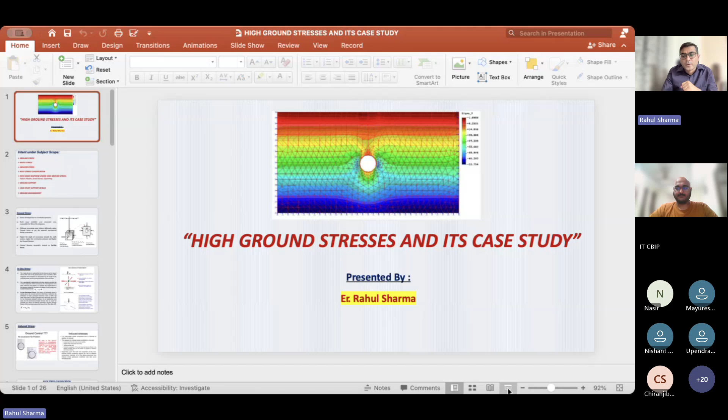Before starting, if there is any glitch in my sound due to network issues or the presentation, please just ping me so that no one misses any information. Now I am sharing my screen with all the participants. I think the screen is visible now, completely, to all of them. I'm sure this tab will not disturb you. You can see my screen completely, though you may notice one extra tab. We can see it completely, we cannot see the secondary tab. Okay, that's good, just a minute.

So again, good evening, good morning, and good afternoon from every part of the world. This is the topic I want to deliver to all the listeners, which is basically high ground stresses and its case study.

Why am I choosing this topic? Because many speakers will talk about FEM and so many things going on underground, but basically we are concerned about the input. I am framing this presentation so that everyone in the listening audience gets some understanding from this information, whether it's site personnel or design personnel, starter, beginner, or intermediate level. At least they will gain a better understanding of high ground stresses, which is one of the critical input parameters in underground structures.

So I will move ahead. The screen is changing, Rishi, because I found the screen is not changing from my end. Yeah, it's not actually changing. That's why, just a minute. Yeah, now it is changing. Yes, yes. I'm sure. So again and again, why is it switching? I'm sure the tab on top is not disturbing anyone. Oh, now it's okay, it's not.

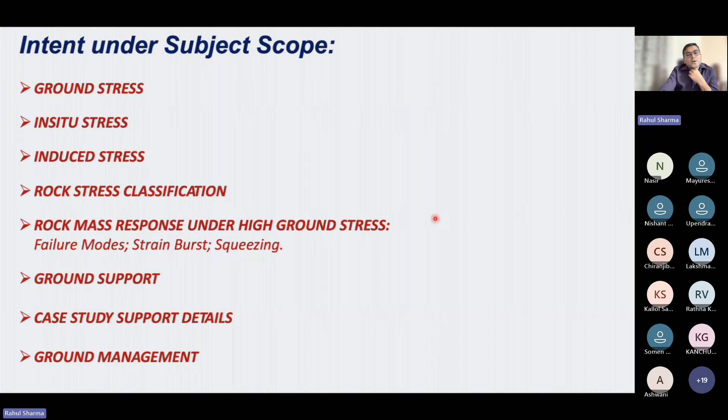So this is basically the intent which I am covering under this scope. The first is the basic theory about ground stresses, in situ stresses and induced stresses. Then we'll move ahead with rock stress classification, the response of the ground under these stress conditions, ground support, and a few international case studies on how they tackled situations arising from high ground stresses, and then ground management theories.

This is basically the ground stresses shown on my screen. Sometimes there is a lot of confusion in the industry about what is in situ stress and what is ground stress. So I am talking from scratch: whenever we make any underground structure beneath the ground, we are basically dealing with two kinds of stresses. One is near field stresses and one is far field stresses.

If you see this figure, which I'm highlighting with my pointer, the complete pressure coming as an overburden pressure is basically the ground stresses, which we can also term invariably as in situ stresses. It has basically three parts: the vertical stress, horizontal stress, and intermediate horizontal stress. If defined in matrix form, it will be a well-bore coordinate defined on a rotational matrix basis.

Whenever you are making a boundary, near field stresses will be developed, which is in a radial and tangential direction along the tunnel boundary. So basically, the complete ground stresses are divided into two parts: near field stresses and far field stresses. Whenever we are disturbing the ground, the boundary which is coming under the influence of the formation of tunnel is called far field stresses. And exactly at the boundary between the ground and the tunnel cavity, it's called near field stresses. Both of these stresses come under ground stresses or in situ stresses.

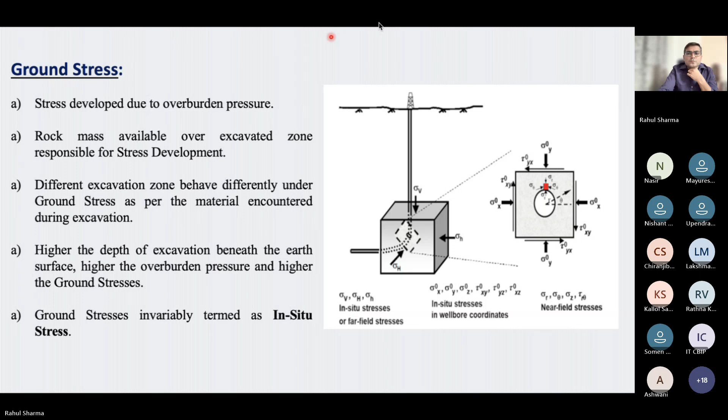I think there is a network issue. It's visible. Next slide is visible. No, actually my slide is not. Just a minute. Maybe I think there is an issue with the network. Sorry for the interruption.

It's very easy to equate in situ stresses with overburden stresses, but sometimes when you go into a mountainous region, the more critical condition becomes in situ horizontal stresses. So we have to keep in mind, whenever designing underground infrastructure, what will be the stress regime inside the ground - that is, the overburden stress as well as the horizontal stresses developed due to tectonic action. These horizontal stresses are equally important as compared to overburden pressure when you go into a high mountainous region, because that is one of the principal parameters to design the alignment of our tunnel.

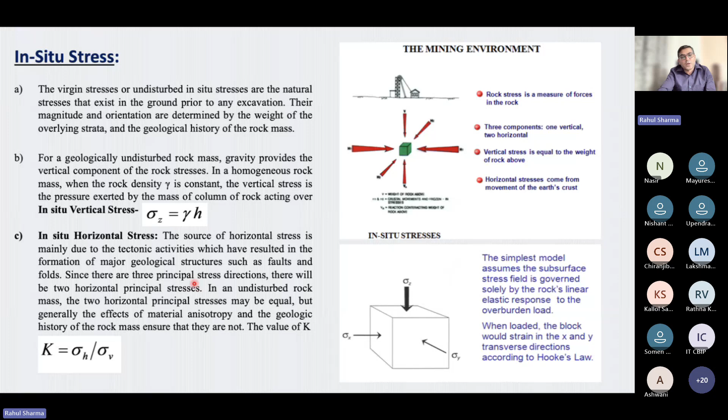So this is the question - why we are saying these are important - because when you are making any kind of cavity inside the mountain, you will find there is a stress regime that exists in an equilibrium condition. When you're not making any cavity, there is no issue. But if you're making a cavity, then your stresses will be mobilized. And if these stresses are not mobilized adequately, it will go again into a compression mode and try to destabilize your tunnel or cavity.

So this question becomes very important: apart from the ground stresses, in situ stresses, how do you manage these induced stresses? Now the question comes, what will be the induced stresses? In simple terms, it's defined as anthropogenic stresses developed due to the removal of natural material by your excavation techniques. You have to be very careful in what way you are excavating the ground and how you are managing the induced stresses, because the balance between the ground stresses and induced stresses is most important for stabilizing any tunnel cavity inside a mountainous region.

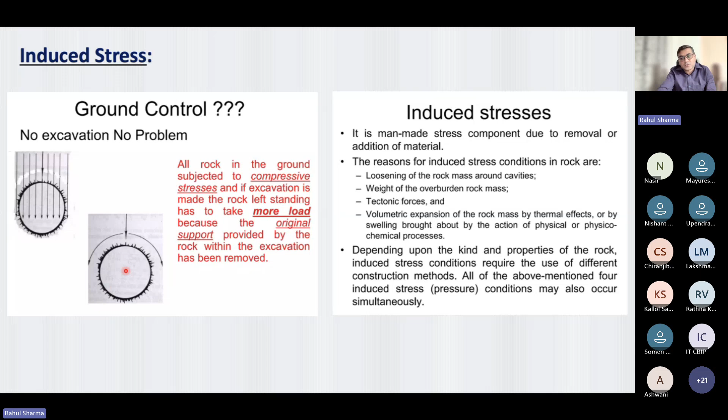Rushi, is my screen visible to you? No, now it is, it's visible. It keeps going back and forth. I'm not sure why it is happening, but okay, now it is visible without any hindrance on the screen, yes, the full screen, that's great.

Now, next is the rock stress classification. The rock stress is basically divided into in situ virgin stresses, which I already explained as ground stresses, and induced stresses, which develop when you do some kind of mining, excavation, pumping, injection, energy extraction, applied load, and swelling. These are the two terms which broadly define the rock stresses. And if you go into the virgin stresses, they have four components, one being tectonic stresses, which is due to the development of plate tectonics.

Then the residual stresses. Sometimes in FEM we put the residual stresses, but what will be the residual stresses? It completely depends on how these rocks will be formed - igneous rock, sedimentary rock, or metamorphic rock. So it will be having a certain procedure of diagenesis, metamorphism, magma cooling. So these residual stresses basically depend on the formation process of these rocks.

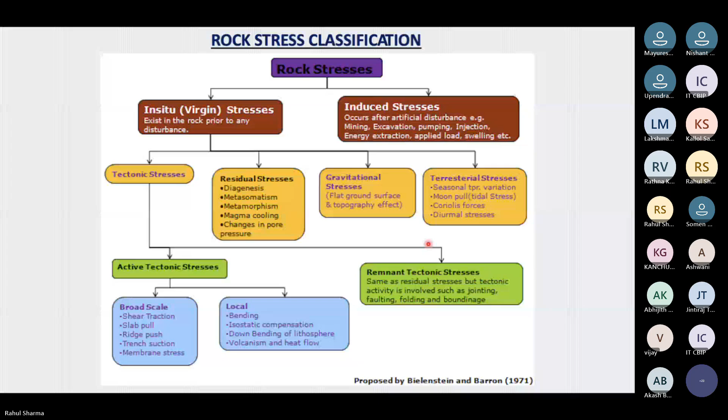So the next is the rock mass response. Now this has become a principle. What we discussed in the previous slides is basically how the rock mass will behave under these ground stresses. So we can discuss the following terms in terms of rock mass stress, ground stress, in situ stress. But in these conditions, how our ground behaves will be coming under this slide. So actually overburden depth, whether height H or Z, whatever term we use, it's basically a stress related problem, which is a function of the following parameters.

So the whole concept of these stresses is divided into three conditions. One is local pre-existing stress field - that means whatever we are doing, either mining or excavation, how induced stress will develop. That means how radial stress will travel and how tangential stress will travel, and that will define your plastic zone as well.

Now the second one is rock properties - that means which rock you are working on, whether basalt, quartzite, phyllite. So what type of rock it is, and what will be the strength of these, and its index properties like density, porosity, sonic velocity. So these, one and two, are functions of your stress related problems.

And the third part is discontinuity. Sometimes it will be clear in mind that rock mass is basically the intact rock plus discontinuities. So the properties of the discontinuities, joint strength, will be very important to assess the stress related problems in the ground.

And if we summarize this graph which I am presenting right now, you will find that to predict the behavior of rock mass adopted for excavation and mining activity - its strength and index property, which is basically its inherent property, details of discontinuity present, that is the nature which develops discontinuities inside the rock, and the other external factors like environment and surrounding. That means how stresses travel because of plate movement, because of certain environmental impact. So this completely gives the information on how your rock behaves when you're doing any kind of disturbance into the rock.

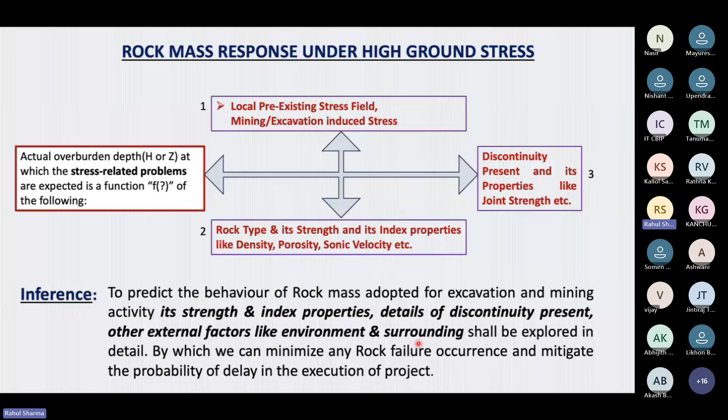This work gives very nice insight into rock engineering in terms of high ground stresses. There's a graph developed around different failure modes by Kaiser and Kim in 2008, defining two phenomena: strain burst, basically rock burst, and rock squeezing. I'll discuss how these work later, but first let's discuss the failure mode.

In this graph, you'll see the term RMR, the rock mass rating, and the next one is sigma 1 upon sigma c. Sigma 1 is basically the in-situ stresses along the boundary, and sigma c is your UCS, the uniaxial compressive strength of the ground. Whether it's basalt, phyllite, or any kind of rock, it has certain properties, the index property of that ground, which we determine in a laboratory.

Sigma 1 is basically the disturbed stresses that develop due to excavation or mining activity. When you see this picture, you'll find that as your RMR reduces, the chances of failure also increase. So he divides this into three zones.

One is a low in-situ stress zone, meaning sigma 1 is 15% lesser than sigma c. In this condition, you can manage by providing proper rock support like bolting, because your response will be either a linear elastic response, or blocks will fall and you'll have to do spot bolting, unraveling, and shotcreting.

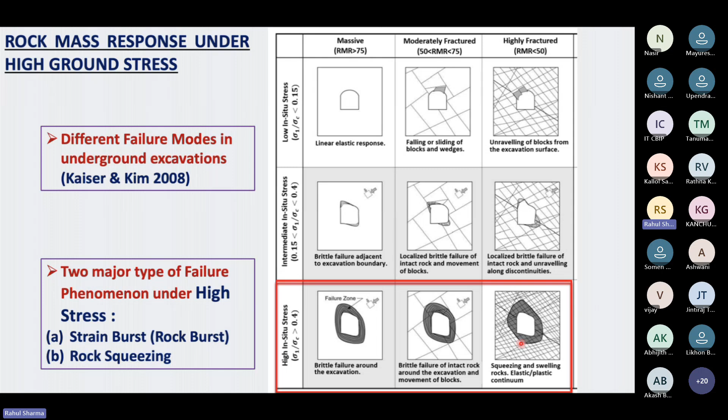Rishi, will it be okay, the pace which I am maintaining right now?

Yes sir, it depends on you. Great, yeah, it's fine.

So this is what we discussed in the previous slide. This one, the outcome is this one. So what I am discussing, it's better to represent in a pictorial manner so that everyone will know what I am trying to say.

So in ground with high stresses, when we go into larger stress conditions, there are two kinds of situations. If it is hard rock, with the uniaxial compressive strength and in situ stress I discussed, then there are chances of strain burst. It's a multiple term - strain burst, rock burst - we can say multiple terms.

So the picture at the bottom, you can find this is the condition of strain burst, where the complete rock will collapse because of the high stress condition.

But if you find soft rock - soft rock is not a very genuine term, we can say hard rock - basically because of fracturing it will be reducing, it will be losing its strength. In such a situation you will find the problem of squeezing. If you see the picture at the top, you will find that your tunnel, whatever section it is, because of the fracturing nature and high stress condition, it will reduce its buckling action, and the whole tunnel will go inside. That is a pure case of squeezing.

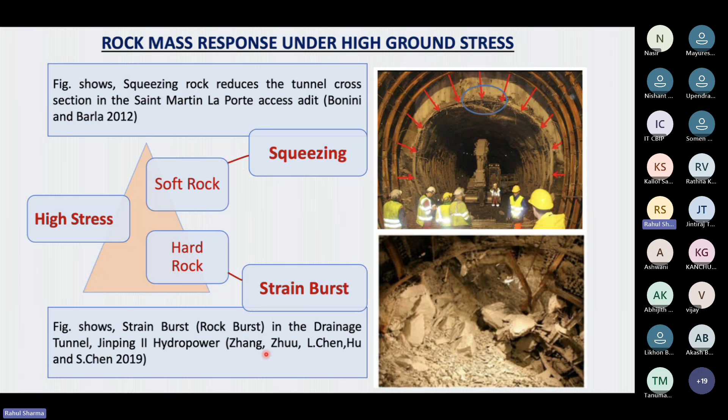So I'm not going to explain further - what I explain will be better judged by the photo as well.

Now the question comes, how can we assess the strain burst and rock burst condition? This is basically taken from multiple books and literature.

The basic concept of strain burst and rock burst is that rock is your massive, interlocked, highly rock mass - for example basalt, granite. These kinds of rock are very strongly interlocked and have less fracture. In this case there are chances of rapid release, causing bursting in massive and highly interlocked rock masses, which can be triggered as a result of rapid strain energy release following rock mass failure, or due to propagation of strain waves due to the adjacent excavation.

Sometimes because of nearby excavation also, if your ground is competent - that means if some work is going on and tunnels are being excavated nearby and the rock is competent - then definitely the excavation will be affected. Same is the situation for structural features like faults.

So seismicity is a very important factor in tunneling or underground works, which is basically about the rock mass itself. As I'm saying, basalt and granite - if such a massive structure undergoes sudden fracturing, then how much energy will be released in a sudden moment? That is the concept of strain bursting.

So strain bursting is basically not triggered by a remote event; the following conditions are necessary. This is the work by Diederichs, 2014, it will be in my references also. Diederichs in 2014 defined the following reasons for strain bursting in tunnels which are not triggered by other events - by itself it is triggering.

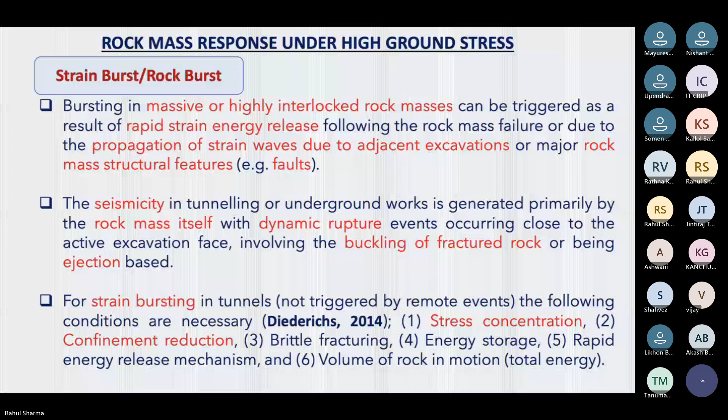The next part is some empirical work done by many people to define rock burst. Frankly speaking, you can just go through these slides and you will find what I'm trying to say.

But in simple terms, when your ground is not competent enough in terms of the in situ stresses developed, when you are making a cavity, you will find these kinds of problems. If your ground is competent enough - that is the whole concept between the plastic zone and yielding zone. If your ground is weaker compared to the handling of your cavity, then definitely the fracturing zone will increase. If this fracturing occurs in a competent rock, then it will cause the problem of rock burst.

This ratio will vary in different books, but sigma theta is nothing but the same kind of tangential stresses. As I previously told, tangential and radial stresses are the in situ stresses. So this sigma theta basically represents the tangential stresses, that is, the stresses developed along the boundary, which is invariably termed as in situ stresses. And this sigma c is the strength of the rock in which you are making a cavity.

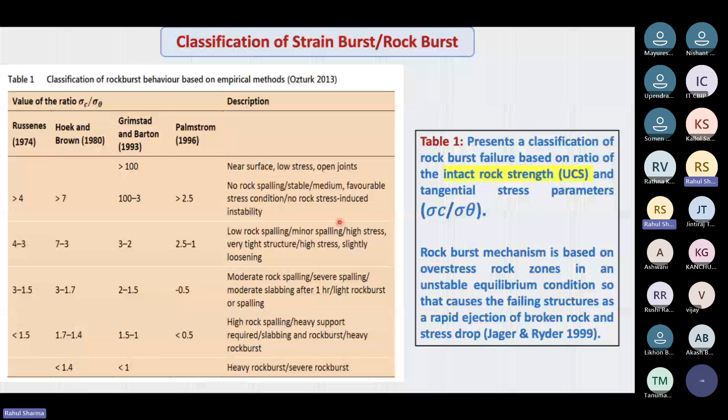So they suggested that if sigma c upon sigma theta is greater than 4, greater than 7, 100 to 3, or greater than 2.5, then there is no chance of spalling or any open joint. And if sigma c upon sigma theta will be decreasing, that will cause an issue of rock bursting chances. So this is all about rock bursting.

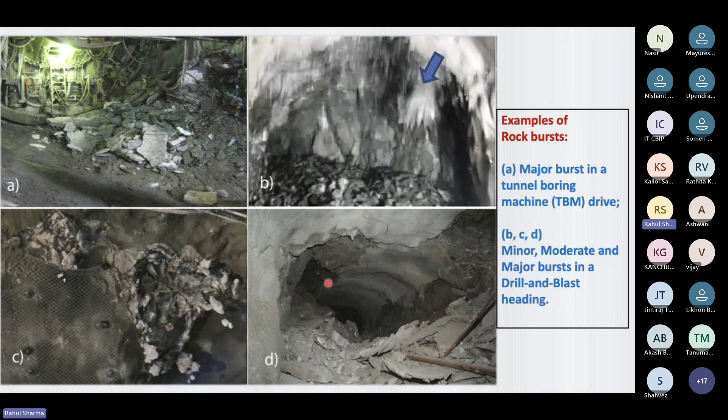So the rock bursting phenomena can be a popping action, it may be a slabbing action, or it may be the complete collapse of your ground. So these are some examples of rock burst.

Now come to squeezing, the other response. I must tell you, it is easy to predict a rock bursting scenario, but it is very difficult to predict squeezing, because as I previously told, squeezing may occur in a strong rock because of large overburden pressure, and squeezing may occur in a weaker rock because of large overburden pressure. So predicting squeezing beforehand, before excavation, at the design stage or tender stage, is a very difficult task.

But yes, if you can do proper geotechnical investigation, you can save so much cost in your excavation. So this is basically the squeezing concept, in which squeezing refers to the ground being weak rock under high stresses. As I told you, either weak rock or high strength rock with a fractured zone, under high stresses, causes the rock mass to undergo large deformation, and this action is called squeezing. And the most important part is that this deformation is not sudden, it may take some time.

So that's why it is very difficult to predict and assess during tender time or design stages. But it is very important to keep this provision in your document, so that there are no chances of variation in the contract document when you understand that squeezing may occur in your ground. This squeezing action may result in damage or failure of the ground support system, or require costly re-excavation. Sometimes because of this squeezing action, you have to re-excavate your tunnel profile.

That means if you have a diameter of 8 meters or 10 meters, you may need to do a larger excavation, because squeezing is difficult to predict during excavation, and once you go for excavation and squeezing occurs, there is no other chance but to re-excavate, reprofile your structure, or provide heavy support. So squeezing ground behavior is identified with large scale deformation in underground excavation. It may occur not only in weak rock mass conditions but also observed in hard rock.

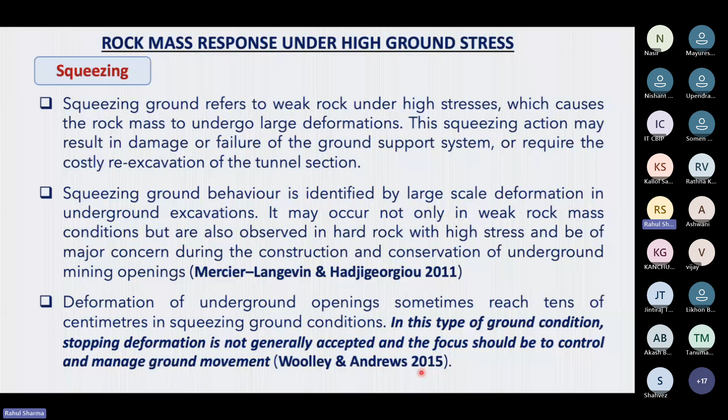That is why Woolley and Andrews in 2015 suggested that in this type of ground condition, stopping deformation is not generally accepted, and the focus should be to control and manage ground movement. Sometimes people try to cater to this squeezing ground condition, but as per the concept established by pioneers, the re-excavation or re-profiling concept comes into the picture for squeezing ground conditions, because controlled or managed ground movement is the most critical part in such cases.

Now, next is the evaluation of rock mass stability. As I told you, evaluation of rock mass stability is the most difficult part to predict, whether it is squeezing or not, because deformation of rock mass happens over a few days, not exactly on the ground immediately. Several empirical methods are already given to assess squeezing ground conditions, and one great work, coming in my further slides, done by Marinos and Hoek, gives a chart which is really useful in many projects.

So here the concept will be completely reversed. They don't talk about sigma c or sigma theta, they talk about rock mass strength. I want to emphasize one point: keep in mind there are two terms. One is the intact rock strength, that is, the uniaxial compressive strength or sigma c.

But here, in case of squeezing, the critical component becomes your rock mass strength, which is basically sigma cm. To know this rock mass strength by the empirical method, there are certain empirical formulas available in books to find sigma cm, because sigma cm is not available in the laboratory. In the laboratory, you can only check index properties like sigma c, the uniaxial compressive strength of intact rock. But when discontinuity comes into the picture, your rock becomes rock mass strength, and this is very important in terms of squeezing ground condition.

So when tunneling is done through squeezing ground, it encounters large deformation and high rock pressure on the tunnel support system. This process is very slow and eventually affects the tunnel opening, damaging the support measures designed for normal cases and creating instability.

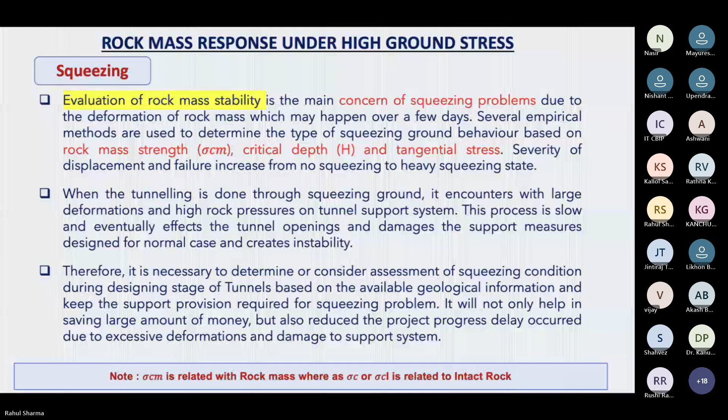The work which I am talking about in the previous slide is basically done by Hoek and Marinos, and it was really a great work because it gives us some kind of idea for tunnelers or people who work in caverns and underground cavities under high ground stresses, about what the basic profiling will be - whether it's minor squeezing, no squeezing, mild, moderate squeezing, or some other kind of squeezing.

So I will take some time on this slide so that everyone, whether new to tunneling or experienced, gets the idea behind this concept. In this graph, it's basically considered as an unsupported tunnel. So your sigma cm upon in situ stresses means the rock mass strength upon in situ stresses - the stresses developed along the boundary of your cavity, radial and tangential.

The ratio of this and the strain - people will always be confused that strain means deformity or displacement, but if I am going in the complete context of tunneling, it's basically the ratio of your tunnel closure in terms of your tunnel diameter. That means if your tunnel diameter is 8 meters and tunnel closure becomes somehow lesser or maybe larger than 8 meters, then the strain has to be positive or negative. So on that basis, we are defining the strain.

So he is giving that if your strain is lesser than 1%, meaning tunnel closure upon tunnel diameter is lesser than 1%, that means you have no problem of squeezing. Or maybe if squeezing will also come, that is hardly an issue because you are always allowing your ground some kind of flexibility in terms of moving ground conditions. So very simple support type, very simple tunneling conditions with rock bolt, shotcrete, and this kind of thing.

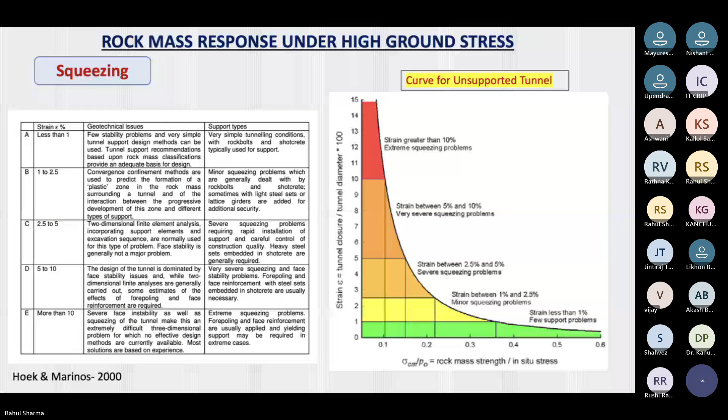So in squeezing ground, these assessments are very important in terms of design and execution, to know whether you are in squeezing ground condition and what kind of support is required.

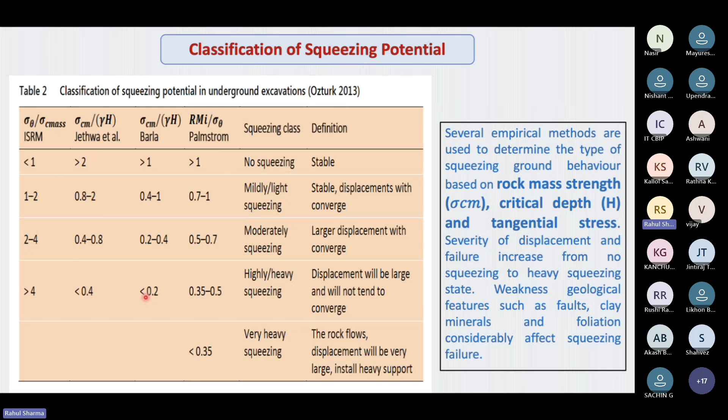So considering one theory, you can always manage the squeezing ground condition. I'd better suggest that during the geotechnical investigation phase, we have to be very careful about identifying where rock burst situations under high stresses and squeezing ground conditions under high stresses will occur, so we can plan our support provisions accordingly, ensuring it doesn't hamper project progress or cause variations during the construction design stage.

So these are two photos related to multiple projects. I won't name the project for multiple reasons. The idea is these are two photos you're seeing - the first is a tunnel closure. If you see my pointer, this is a clear case of complete collapse under squeezing conditions. This is basically good, high competent rock - I must say this rock is competent, but due to fracturing it will deform under high stresses.

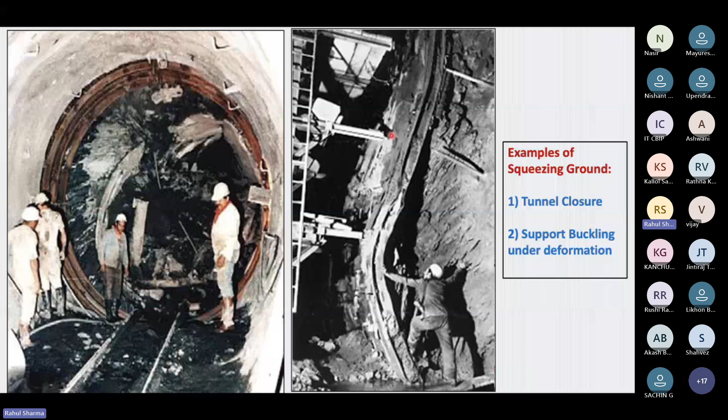And the second case is buckling of your steel set - complete buckling. These situations are prominent. When this kind of situation occurs, you have only two options: either re-excavate the tunnel with a larger size and put in larger support, and all the support previously installed becomes waste for this new profile. So again, large costing and further delay.

Now the next topic is ground support under high stress. What I've discussed will be completely summarized here - how we manage ground support. The three important concepts are: uniaxial compressive strength of rock mass is an important element of failure initiation. As I told you, when in-situ stresses develop because of the excavation - anthropogenic stress - if it goes in such a manner inside the rock that doesn't impact the existing ground condition significantly, your plastic or yielding zone will be smaller, and the ground will be competent enough to handle these problems.

Failure initiates at the boundary of an excavation when the strength is exceeded by the stress induced on that boundary. So if the stress induced on the boundary is more than the strength of the rock, failure will initiate and propagate from initiation to further stages, eventually disturbing the rock until it reaches rock with higher UCS than the induced stresses. So this is the complete phenomenon behind squeezing ground conditions - keep in mind the strength of the rock and how stresses will channelize during excavation in terms of in-situ stresses.

The most numerical model can follow the similar process of fracture propagation, and this level of detailed analysis is very important when considering the stability of excavation in rock and when designing support systems.

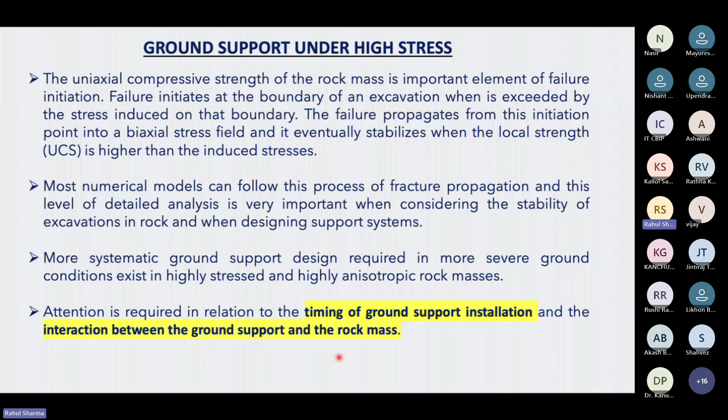In squeezing conditions, as I already told you, the timing of ground support installation is key between the ground support and rock masses, so that you can create conditions where you safely dissipate the stress. Because the complete theory of underground is stress management - when you provide support, how you manage the stresses and how you channelize the natural stresses by using your ground support installation.

This is work done by Hoek and Brown in 1980, in which they suggested considering low stress level and high stress level, and they gave a multiple support system as well, which is still prevalent till 2025. They are the pioneer people in the study of rock engineering - Hoek and Brown and everything.

If you see massive rock, meaning no jointing, with low stress level - then you have a massive rock subject to low in-situ stress level, no permanent support is required, and light support such as spot bolting or shotcrete will be enough.

But if there's a high stress level in the same massive rock, you have to be very careful and provide some kind of pattern rock bolt or dowels, mesh, shotcrete. So even in massive rock, your support system pattern will change based on the stress level, and this theory applies for jointed rock as well as heavily jointed rock.

These kinds of charts become an empirical and guiding method for us when designing a support system. For example, in heavily jointed rock - meaning your ground is competent, but you have high stress level and heavily jointed rock.

Then you have to provide some kind of steel fiber reinforced shotcrete, as well as invert struts. If there are chances of ground heaving, you have to provide invert struts as well. You are also reducing the spacing of the ribs or lattice girder.

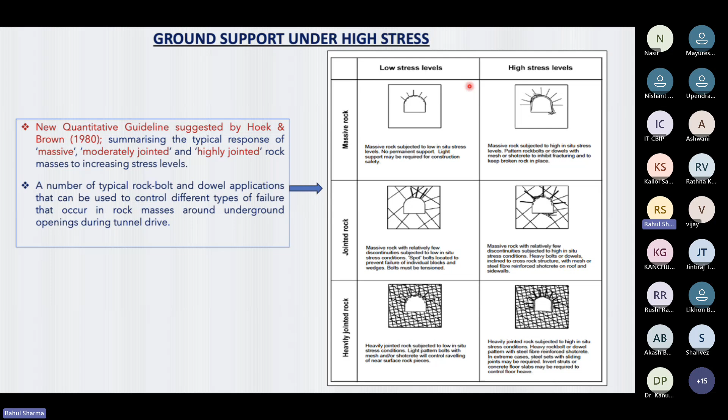So this is the complete theory he propounded for different rock type conditions with high stress and low stress conditions. Further to this concept, next is a case study, which I already told you I would share. I suggest everyone at the site or in design just read these kinds of concepts.

RB is basically nothing but a rib. As for SRB - if I'm discussing SRB, RB is here, it's clearly radial bolting. Sorry, SRB and SRH will be your steel ribs, and they basically define the complete phenomena of what they used, so that people will be aware that if similar ground conditions are encountered, they can correlate the information.

Even though we are in a more difficult situation compared to other ground conditions, because our ground variability is very sensitive compared to them in case of the Alps or Andes, they still suggest some good pathways for us to work with and at least safeguard our structure. Or if we cannot safeguard our structure, at least we can have provisions in place, so that when such conditions are encountered, we can easily handle the situation.

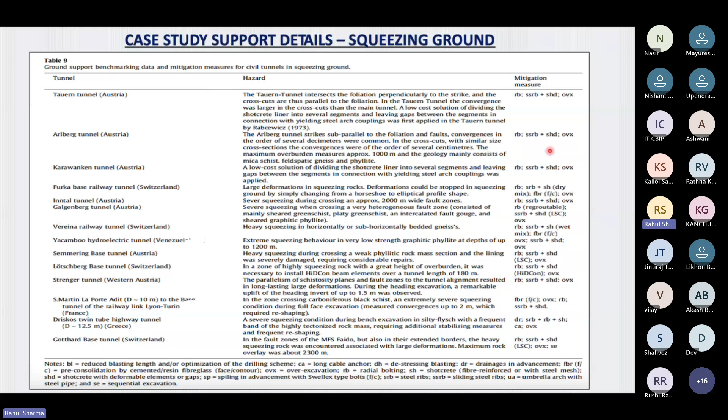This becomes a guiding reference for us when catering to such situations. It's always advisable to keep this as a ready reference, because phyllite is always phyllite, whether encountered in the Indian context or elsewhere. If phyllite occurs, we should be careful that squeezing ground condition may occur, and consider what kind of support will be required. Take reference from this literature and keep it in your DPR provisions, so that large variations and project delays are safeguarded during construction.

The process to predict and manage rock behavior is the most important part in ground management. This means we can predict what kind of situation will occur - rock burst or squeezing - and accordingly design a support system. Will it be rock bolting, steel ribs, lattice girder, shotcrete, cable anchor, whatever it is? We have to know the ground condition and modify our support system accordingly.

Through this webinar, I must say that a civil engineer or rock engineer may not have as much knowledge of ground condition as a geologist will have. So you will always make one good geologist friend. My suggestion to everyone working underground is to make one or two good geological friends, so they can boost your knowledge of ground condition, because that is a most critical part in underground engineering - whether it's a tunnel, cavern, road, transport, or hydro project. You have to be careful about understanding the ground in which you are working.

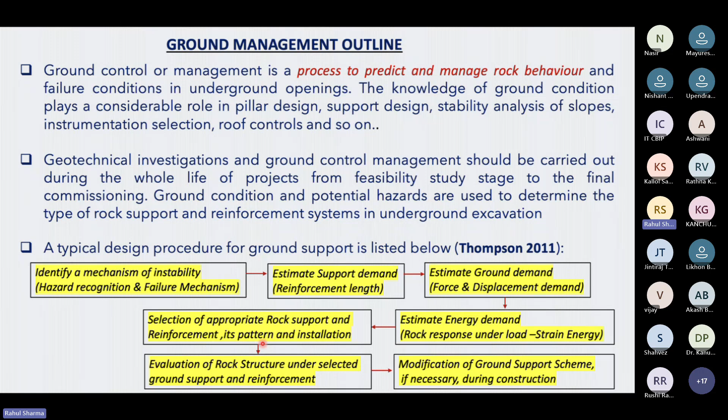During construction also, you can evaluate what the designer proposed for the rock structure. If it is necessary to change these things, modification of the ground support scheme if necessary during construction. So this is the complete philosophy that every construction project below the ground needs to follow.